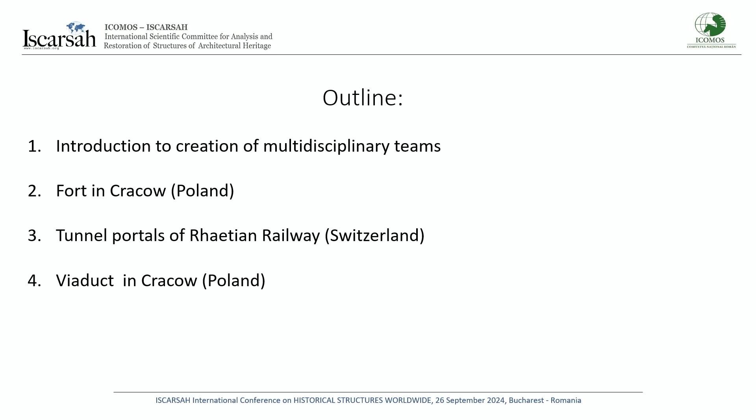So I will show some introduction about the creation of multidisciplinary teams. Also, I will show three kinds of examples: one, a fort in Kraków, Poland; tunnel portals in the Rhaetian Railway in Switzerland; and also a viaduct in Kraków, Poland.

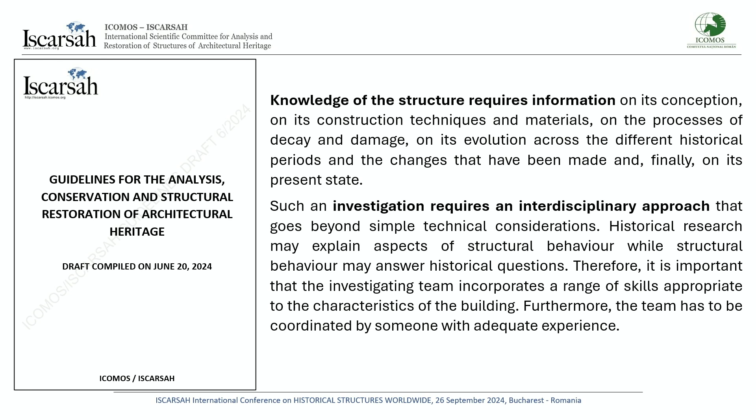If we read the guideline for the analysis, conservation and structural restoration of architectural heritage prepared by ISCARSAH, we can read that knowledge of the structure requires information, and investigation requires an interdisciplinary approach. It means that multidisciplinary teams are required.

I would like to show you how it goes through these examples. So the first example is Fort 49A Dłubnia. It is a structure constructed by the Austrian army at the end of the 19th century, and it was not damaged by wars, but was damaged by devastation and overzealousness done by people.

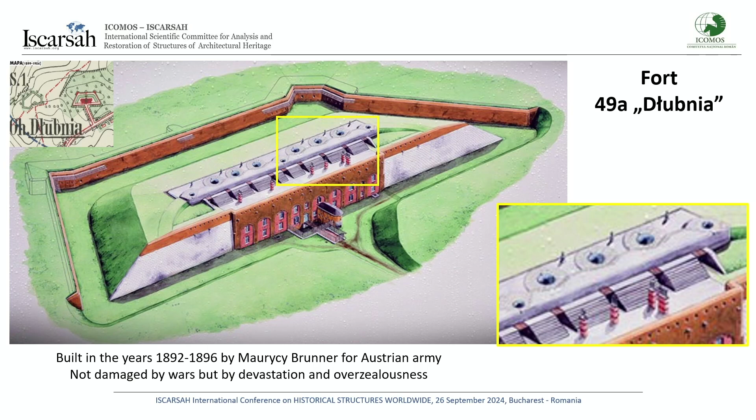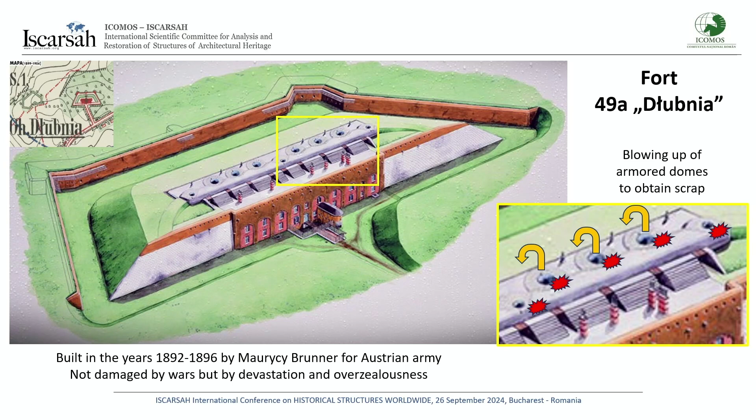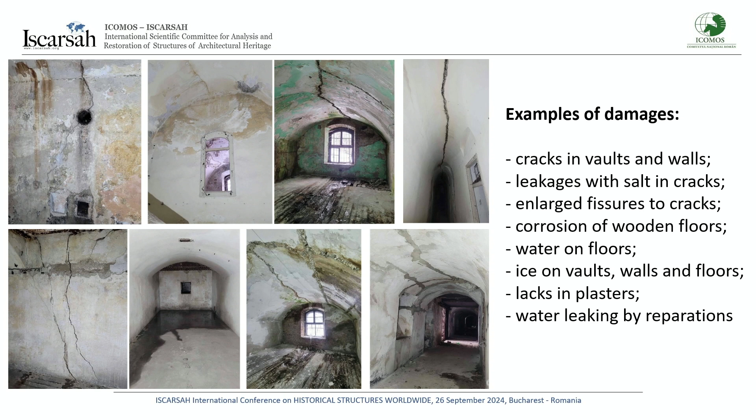If we go to the details, these armored domes were blown up by Polish soldiers in the 70s of the 20th century because they wanted to obtain scrap. As you can see, there are serious damages: cracks in walls, leakage with salt in cracks, large fissures, improper reparation, corrosion of wooden floors, water on floors, ice on walls and floors, lack of plasters, and water leakage by reparation.

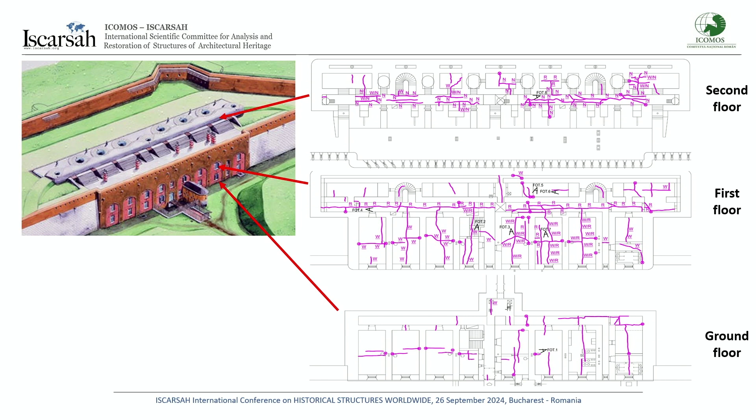These were present on all floors that are presented here. As you can see, according to the damages related to these armored domes—it is on the upper part, but there is also space for soldiers where we can observe other damages.

These damages were caused by something—maybe not improper construction, because at the beginning when people constructed the concrete vaults, in this case they did not know about shrinkage too much. So fissures and cracks that appeared on the roof allowed water to enter inside the structure. But Austrian soldiers, experienced with that, made the roof that is presently shown in the picture, the wooden roof, protecting the structure against water.

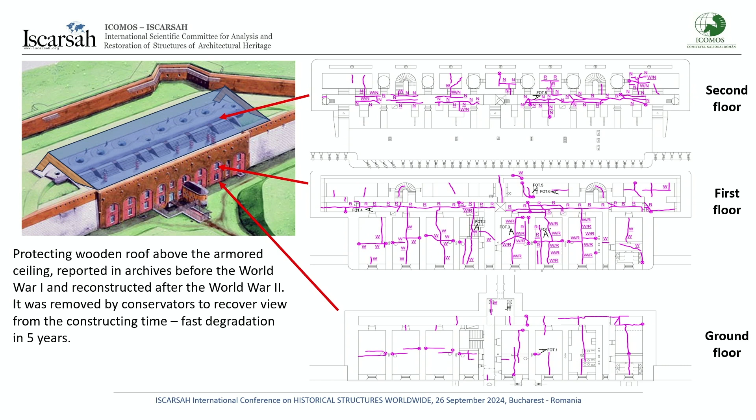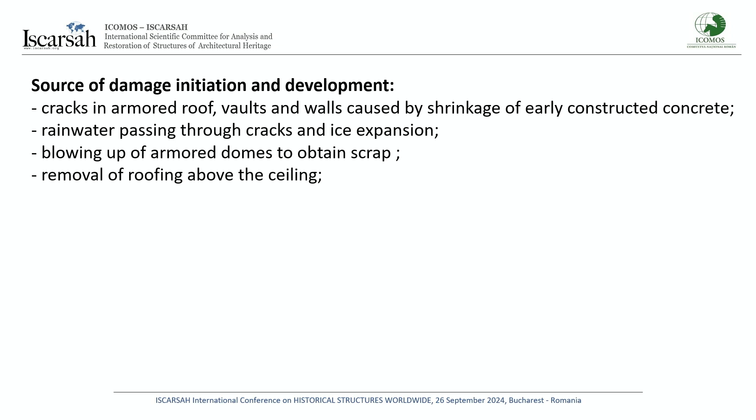So, the source of damages, initiation and development: of course, cracks in the armored roof, vaults and walls were caused by shrinkage of the early constructed concrete. Rainwater was passing through the cracks and ice formed there, causing more damage. Also, blowing up of the armored domes to obtain scrap was a source of the damages. And finally, the most serious was removal of the roofing above the ceiling.

We can point out that there were some negative actions of experts. First, not enough deep study of archives, meaning lack of identification of historical structural problems. Also, only one expert made the decision about removing the protecting roof, without studying deeply the source of this roof in the past.

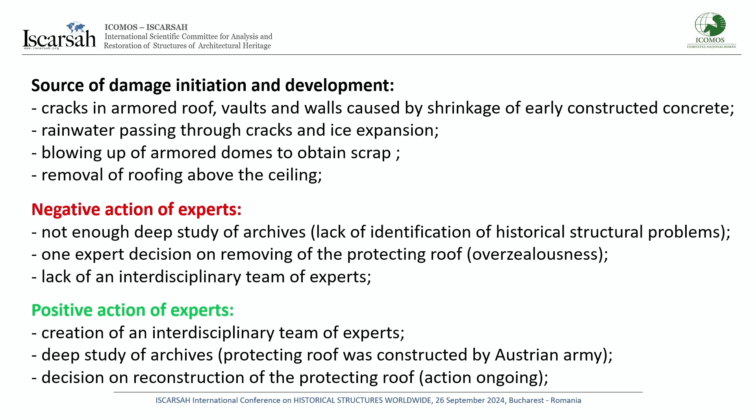Also, lack of interdisciplinary team of experts was an issue. After serious damages occurred, a new interdisciplinary team of experts was constructed, including engineers and conservators. Also, deep study of archives was done, where we recognized that the Austrian army constructed this protecting wooden roof very early. The decision on reconstruction of this protecting structure is a plus of this action, because now it is ongoing.

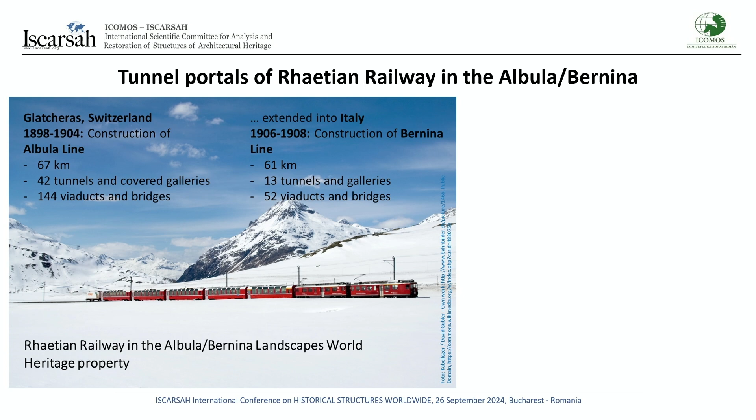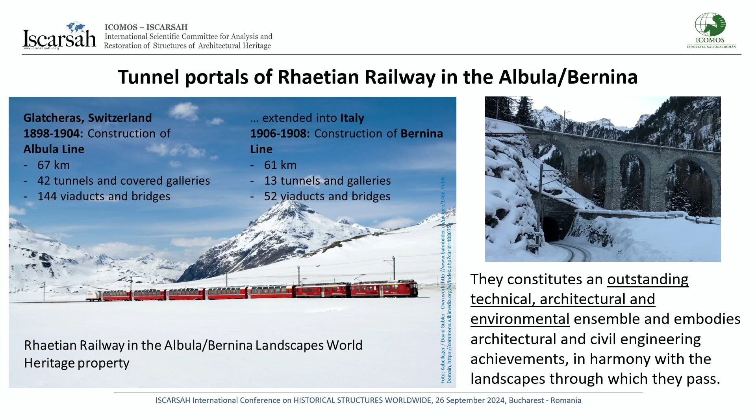Another example is the Rhaetian Railway, a heritage property on the ICOMOS list. In this case, you can see that this kind of structure presents very valuable features, because it constitutes an outstanding technical, architectural and environmental ensemble, embodying architectural and civil engineering achievements in harmony with the landscapes through which they pass. So what was the main problem?

It is the challenge, because at the beginning the structure, the tunnel and the portals, were designed for a special speed, 30 kilometers per hour, and a special profile. During the exploitation, they increased the current operation requirements so they could use it more effectively. But the owner of the structure wanted to improve the effectiveness of the railway even more, so these requirements came first, and they wanted to reconstruct the entire structure.

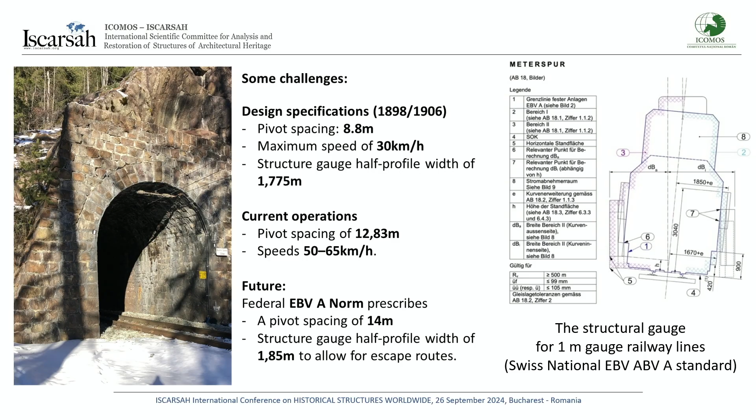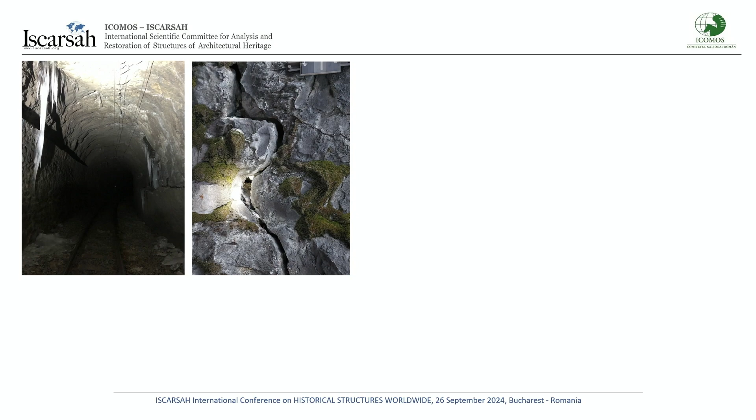So when they did some investigation, they found that damages inside the tunnels were very serious. Of course, not in all tunnels, but in some of them. And they designed for safety.

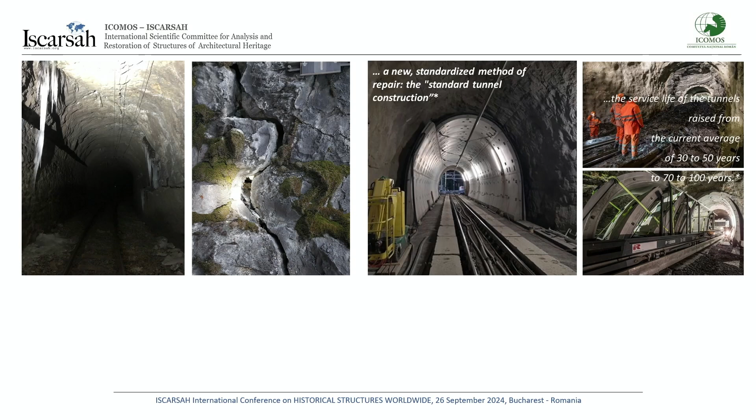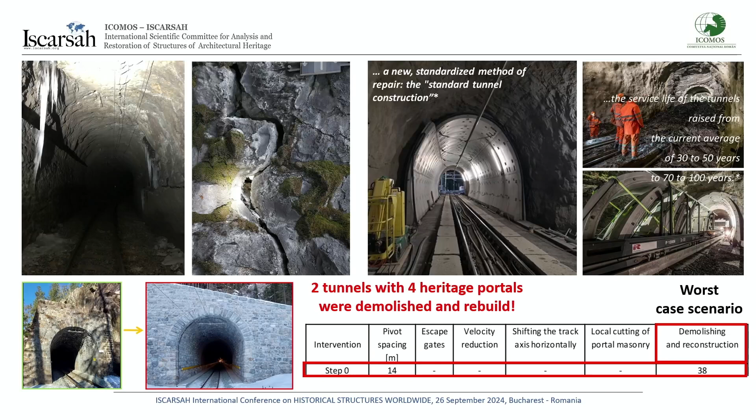So they designed a special standard method for repair, constructing a new inner part of the tunnel. But also they wanted to reconstruct the portals. They designed to remove, completely destroy, and rebuild 38 portals. So in this case, they started to do it. Two tunnels were repaired, and four of them were demolished and reconstructed, as presented.

May I ask you the next one?

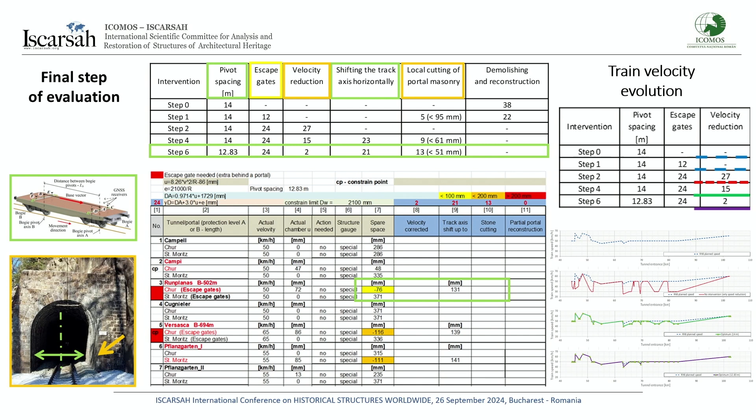During the action, we created a special team in this ICOMOS ISCARSAH initiative, with a very wide team of experts from railway and from conservators in Switzerland. We went step by step to find a solution for minimum intervention, and also to find as effective a solution as possible for the owner. In this case, we found such a solution. I'm not going into details - you can read more in the presentation we gave at the SAHC conference in Japan.

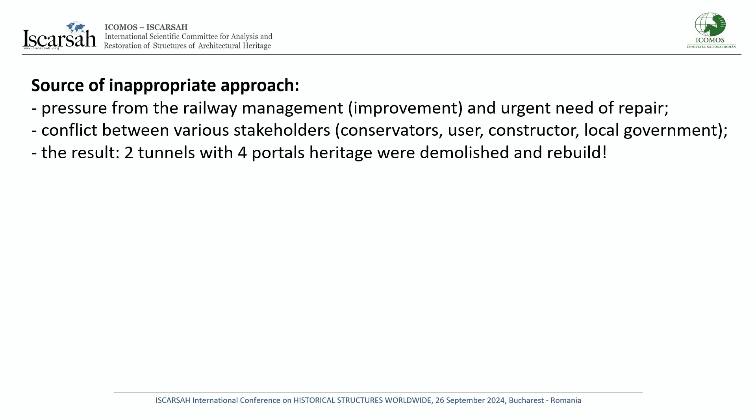So, source of the inappropriate approach: first, pressure from the railway management. They wanted to improve and urgently repair all the damages. Also, there was a natural conflict present between various stakeholders - conservators, users, authorities, the constructor, and the local government. Each party wanted to do different things. As a result, two tunnels with four portals were destroyed and rebuilt.

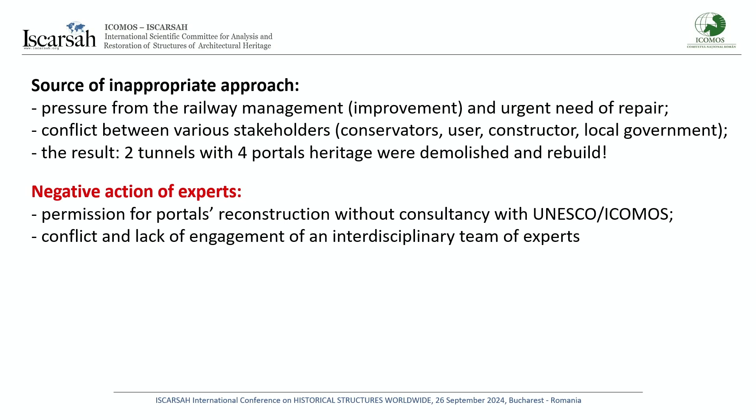Negative action of experts: permission for portal reconstruction was given without consultancy with UNESCO and ICOMOS. Also, there was conflict and lack of engagement of an interdisciplinary team at the beginning of this process.

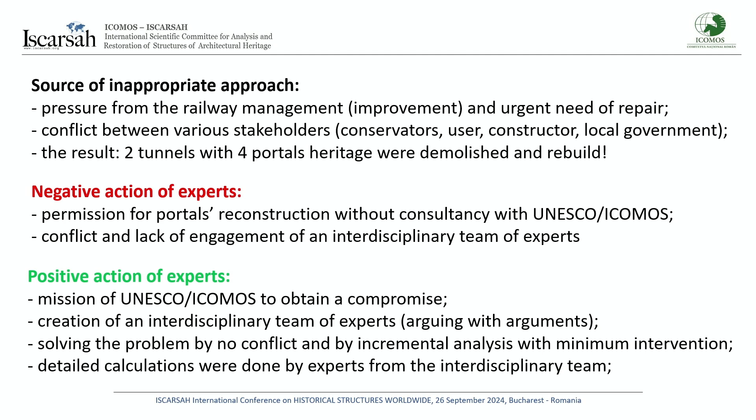Positive action of experts: after creation of the ICOMOS UNESCO mission team, we obtained a compromise with these people. We sat close to one table and started to evaluate step by step what we should do. This team had some arguments, and others had the same. So we found the compromise, and also solved the problem because we did precise calculations - moving the track, cutting some of the stones, and adjusting the speed of the train. In this case, we were able to find a proper solution.

And the last example - I can say that it is a shame of Kraków, or maybe rather a shame of Poland. I mean the Grzegórzecki viaduct. Initially, it was constructed as a bridge. Next, it became a viaduct, by filling the river with gravel.

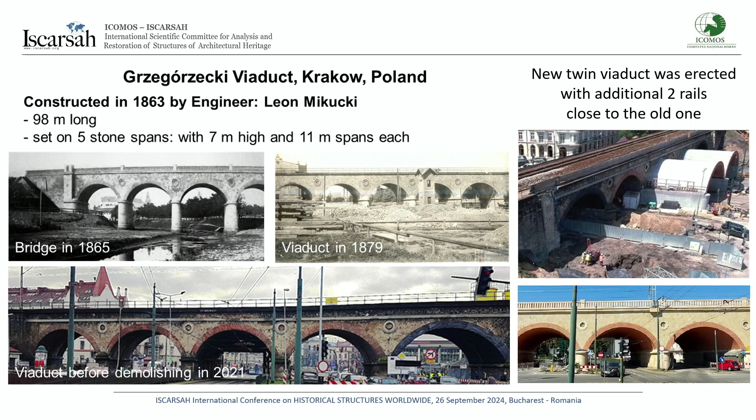And finally, in 2021, the whole heritage structure was demolished completely. Why? Because Poland received money for a new railway, and they wanted to make this railway passing through Kraków more effective. So they constructed reinforced concrete new twin viaducts very close to the old one, and also they wanted the old bridge to follow the same standard as the Polish railway standard.

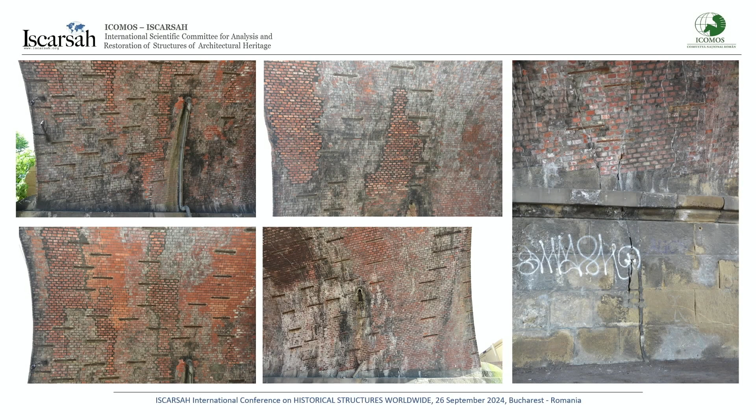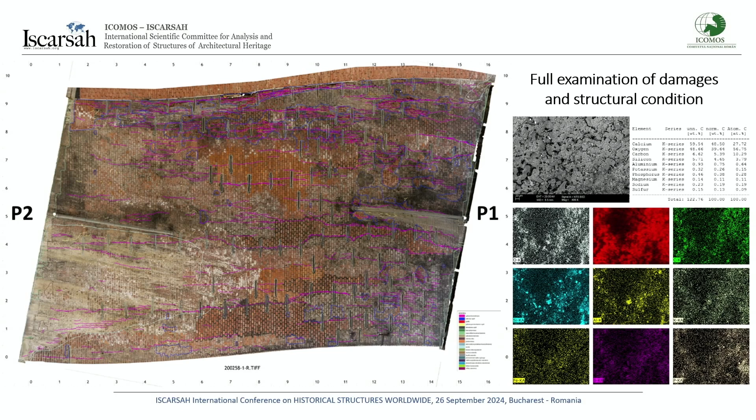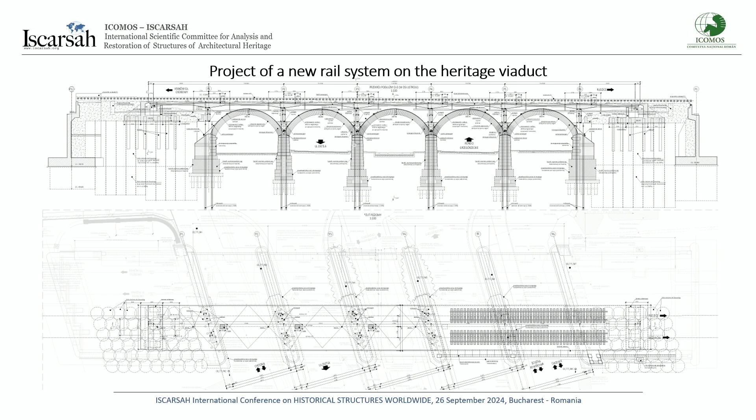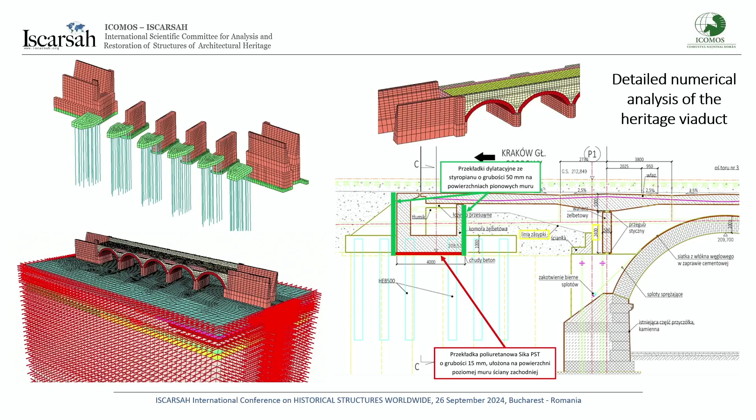But the structure was in very poor condition. We did a lot of research, so we created an interdisciplinary team where three experts of ISCARSAH were involved, also half of experts were scientists from Kraków University of Technology, and also designers of the railway, conservators, and some authorities. We did a lot of investigations, and there were tons of results. There was also an elaborated special project modeled with numerical analysis, including everything step-by-step in the design approach.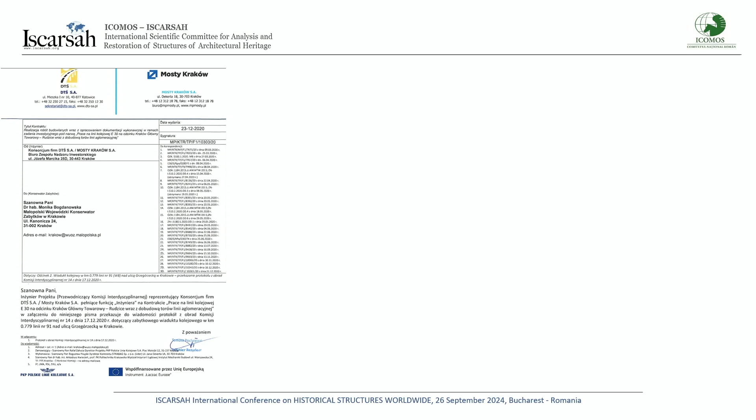So we solved finally the problem. We proposed some minimum intervention for repair of this viaduct to make it able to carry the loads according to new standards, and we passed this elaboration to the conservator office. It was accepted.

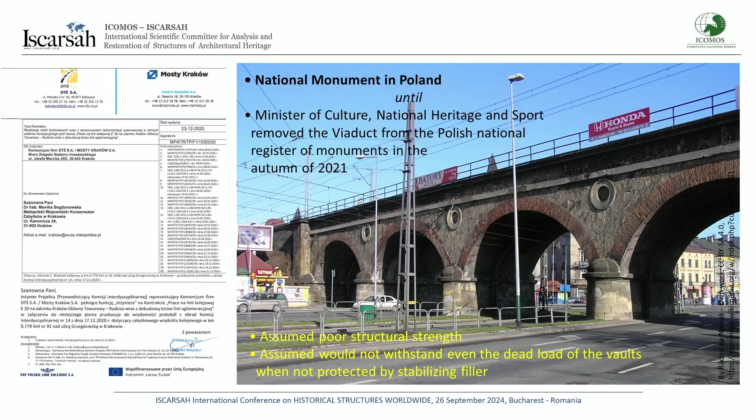But what was the problem? Initially, before the interdisciplinary team was formed, the conservator had the opinion that the structure assumed poor structural strength. This is the first. As second, it would not be able to withstand this dead load. So this was the statement of this conservator authority.

When we passed our solution as a team to the ministry, they ignored it completely. They removed the structure from the historical list and were able to demolish the structure. So they did it.

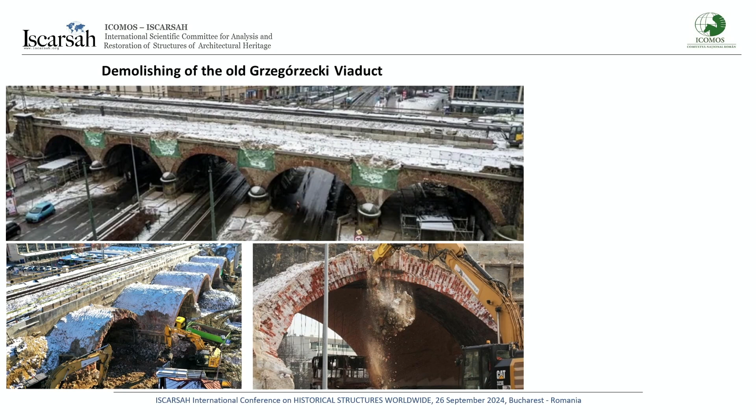What was very tricky, is that it was argued the structure was in poor condition, but you can observe that even when they removed the whole gravel from the structure, they had to use very heavy equipment, dynamic equipment, to demolish it. Even if the structure was supposedly in poor condition.

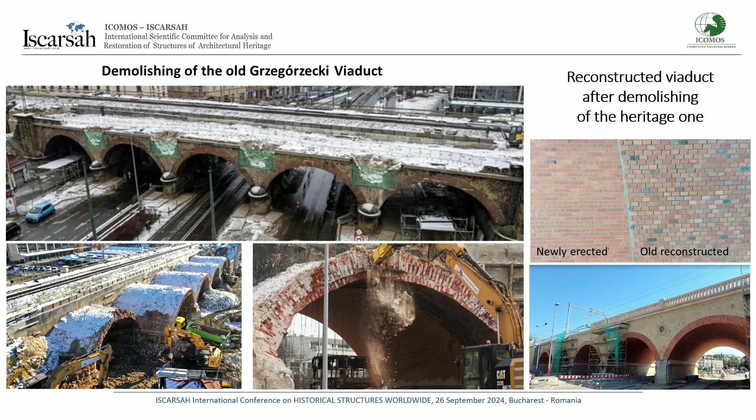Now you can see the visualization of the newly erected and old reconstructed viaduct. Of course, both are reinforced concrete structures with a cover, a masonry cover.

Source of inappropriate approach: of course pressure from railway management that wanted to improve and repair the structure very quickly, and of course conflict between various stakeholders. In this case, I can say that as a team, we had to make a very big effort to convince the conservator expert from the conservator side that we were right.

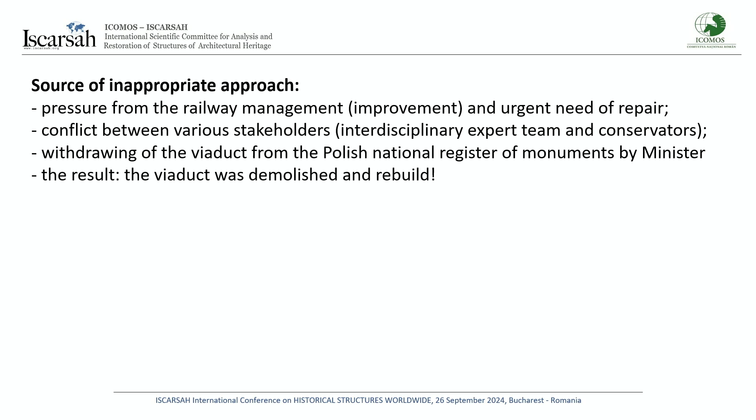But finally we found a compromise, and we had to say the same statement, that it is possible to make a proper structure meeting all requirements. But one guy, one minister, withdrew the viaduct as the solution, and the path led to destroying the structure, and also the viaduct was demolished.

So, positive action of experts: we created a really competent, interdisciplinary team. We did a lot of work, a lot of elaboration, a lot of tests, on-site tests and laboratory tests. We elaborated the proper solution, and in this case we finally received acceptance from the conservator office. So we were sure that we were able to construct everything.

After half a year, of course, there was negative action of experts: omission of decision, indecision on the full documentation prepared by the interdisciplinary team, like we did nothing. And also, what is very important, conflict between people.

So in conclusion, I can say that setting up an interdisciplinary team of experts for protection of a heritage structure is a must. It must be interdisciplinary; no one should decide singularly about such serious problems. Also, we should ensure there is no conflict during the elaboration. We should avoid conflict, because it can cause the structure that we would like to survive to fail instead. It will be the victim at the end.

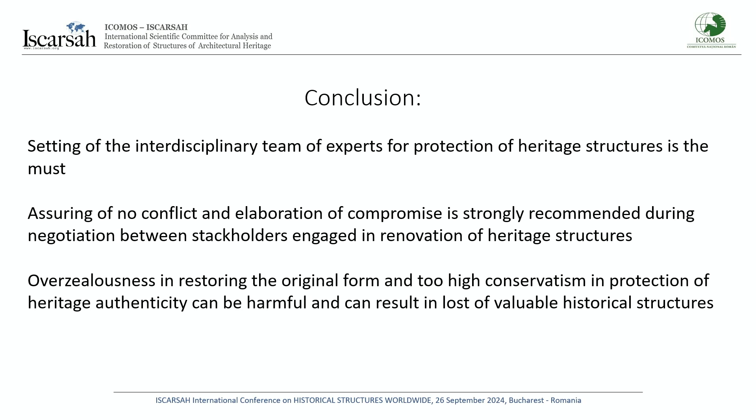Also, overzealousness in restoring the original form, and too high a conservatism sometimes in protecting heritage authenticity, can be harmful and can result in the loss of valuable historical structures. Thank you very much.